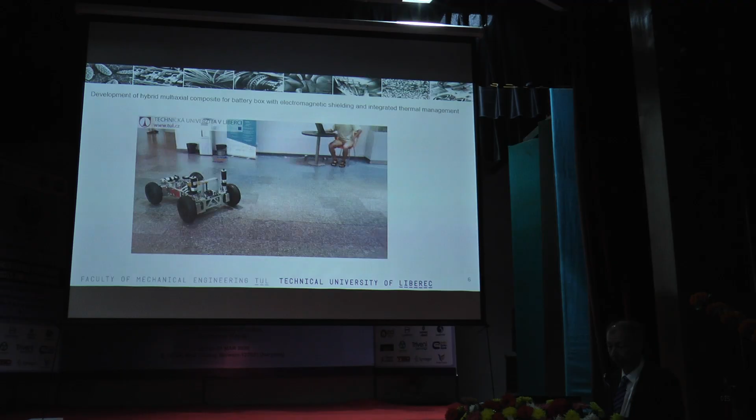Our part, mechanical engineers, was construction, design; mechatronics created controlling software, logic; and textile engineers created the cover of this car. In this video it is without cover. But we were thinking about which part we can improve, and one of the parts we can improve was the battery or battery box. This vehicle has a standard commercial battery, but we were thinking about improvement of the battery.

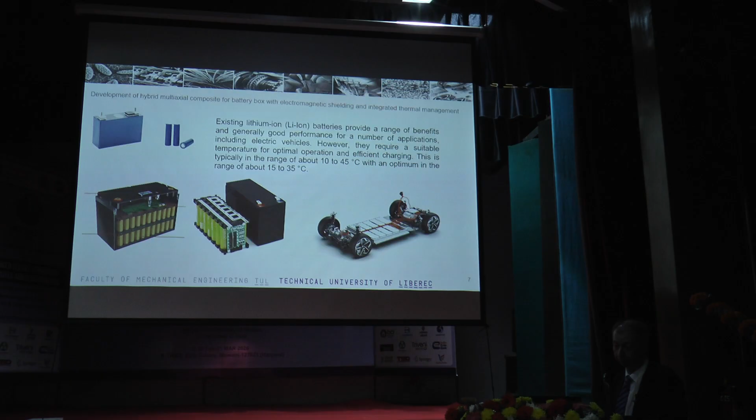Usually batteries use these cells. Other kinds of batteries are possible, but usually we use cylindrical cells, and a key parameter of the battery is temperature. Optimal temperature is about 15 to 35 degrees Celsius, but more interesting is the difference between individual cells. During charging, if the cells' temperature difference is over 5 degrees, it can be a little bit of a problem. If it's over 10 degrees, the lifetime of the battery goes down rapidly.

Then we were thinking about a box for the battery which can provide heating, cooling, and other properties. Heating is important, maybe not for India. For India cooling is better, but in Czech Republic last week we had minus 10 degrees. In the north part of Europe minus 30 degrees is possible. Before you go by electric car, it's good to preheat the battery for its long lifetime.

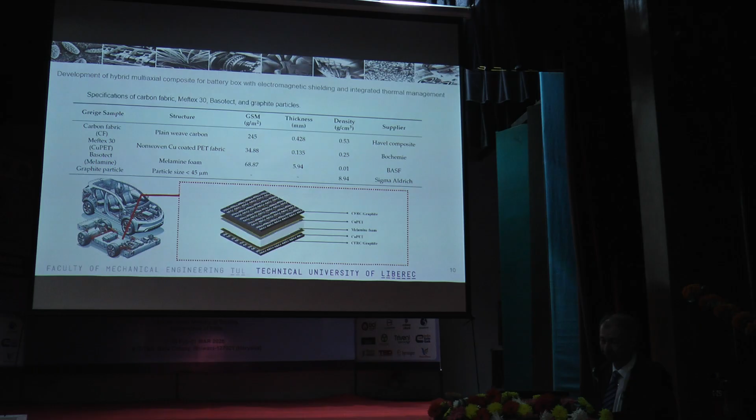So we thought about the design of the battery box, and we started with these layers of batteries: outside cover, inside cover for mechanical durability, cooling system, heating system, and we tried to combine these functions into one layer. Then you can see, we were thinking about a composite with heating properties, maybe also insulating properties, and so on.

The group which was involved in the composite part created a few types of composites, and the input for these composites was plain weave carbon, non-woven copper-coated fabric, melamine foam, and they used graphite particles. And I show you the combinations. We created 8 combinations of these materials.

The first one, only 2 layers of carbon. The second one was 2 layers of carbon and a middle layer with copper. The third one was 2 carbon layers and melamine foam. Melamine foam was there for insulation, and the final one was the full set of 5 layers: carbon, copper, textile, melamine, and again copper and carbon.

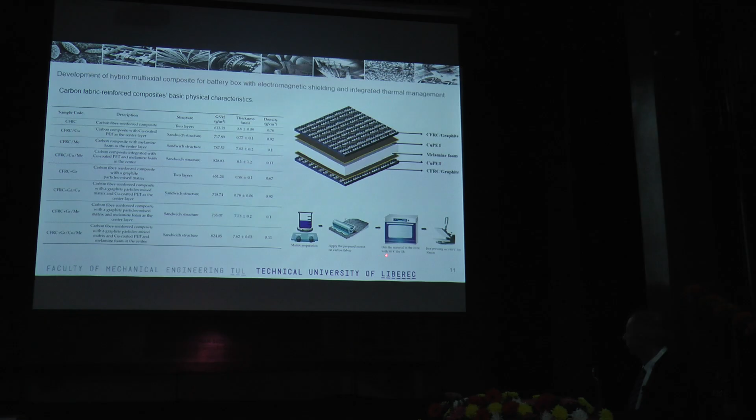The second group was with graphite particles mixed into the epoxy resin matrix. This one with standard epoxy resin, this one with some graphite particles. We used a handmade procedure to create these composite samples. That means like this, dry and hot pressing by hand.

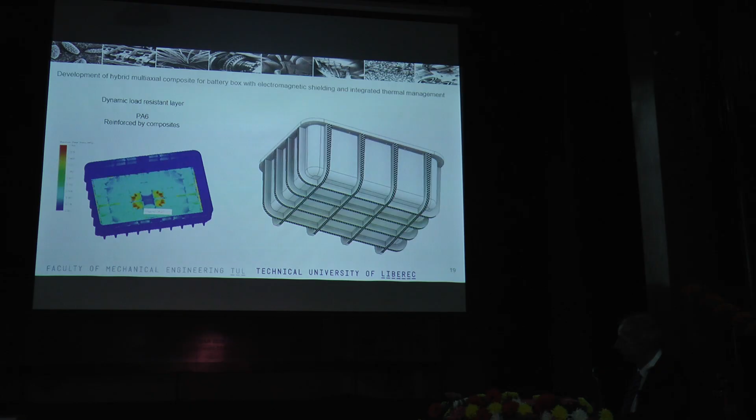There is a plastic cover, PVC foil for protection from rain or something like this. The middle layer is here. It's from PA6. The first attempt was made by 3D printing. After that we reinforced it with carbon filaments. We have a robotic placement head for thermoplastic carbon filaments, and here you can see the animation of some simulations of falling of the battery.

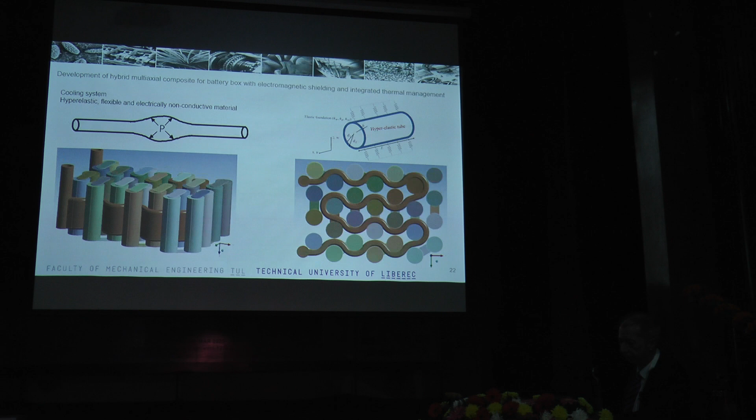And here is final information about the cooling system, because a typical cooling system is made not by hoses but metal hoses, and it's difficult to assemble the hose among all the cells. We use the hyperelastic hose. It's very simple to assemble the battery, and we created a sample for testing, applied the thermocouples, and a colleague tested charging of the battery and the difference between individual cells.

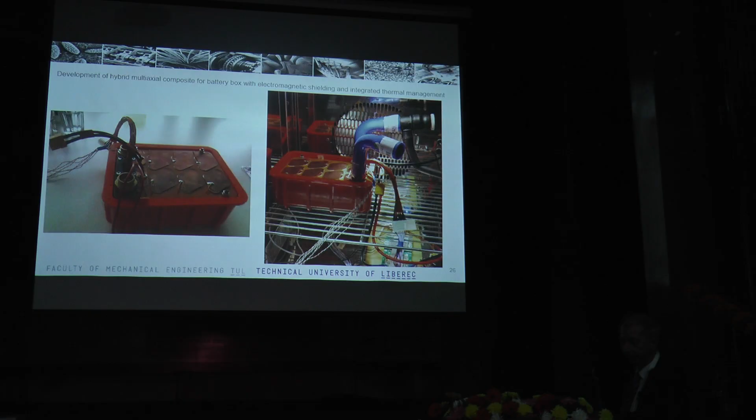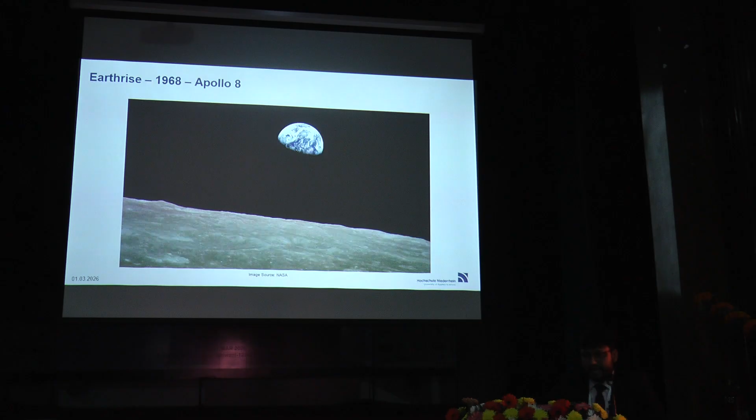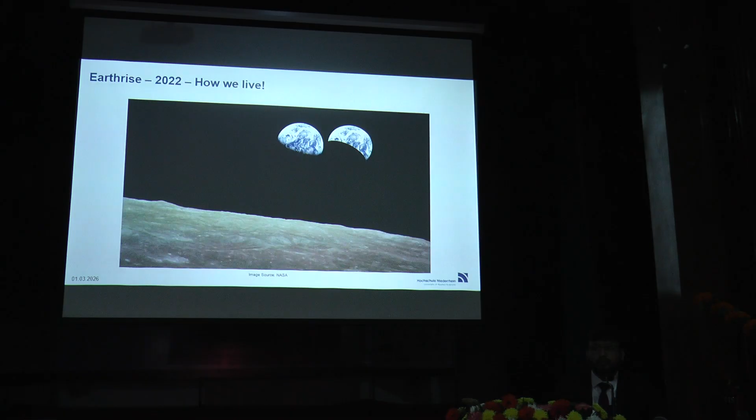trying to imitate the image. And after that, so many rockets and astronauts traveled in outer space and looked at our world, and they found that we are actually living in a similar world, although in so many cases European people might think they are living in a different world, Asian people think they are living in a different world, but that's not true. We are totally interlaced, interconnected in this neural networking system.

So if it is a problem for me in Asia, it is also a problem for Europe, and probably yesterday you saw the news about how the war began between the US and Iran. So yes, it's a problem, and we need to tackle it.

So at the university where I work, we try to combine sufficiency, consistency, and efficiency. And we are trying to create the future through our weaving. How? We are trying to weave technology, material, process, management, policies, and all kinds of deals so that we can be connected through the digitalized platform, which became very, very important for us.

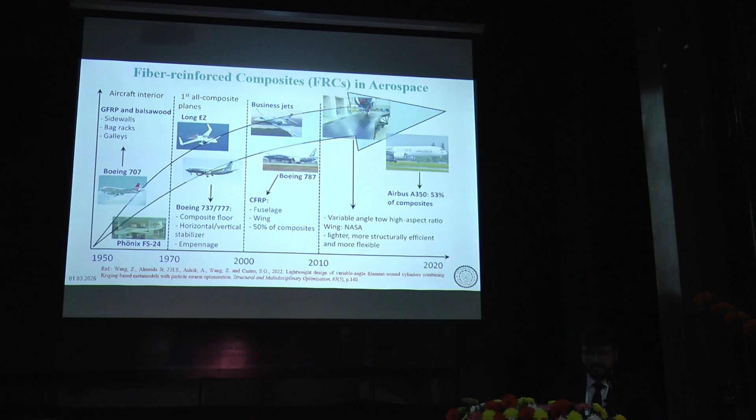So now let's talk a little bit about fiber reinforced composites. As you know, they have been in the scenario for the last 50, 60 years, and they've been heavily used in aerospace, and you can see from this picture that over the years, the usage of fiber reinforced composites has skyrocketed in Boeing and Airbus manufacturing. This morning, Professor Sabas mentioned it in his lecture, and this graph shows how much advancement has happened, especially in fiber reinforced composites for aerospace structures.

And as Professor Behera also mentioned in his lecture, this usage and the market are growing; it's going to be a $71 billion US market by 2031, with a compound annual growth rate of almost 10.75%. They will be involved in electric vehicles, aerospace, automobiles, and hydrogen vessels, which became a very important topic for using hydrogen fuel in the automotive industry.

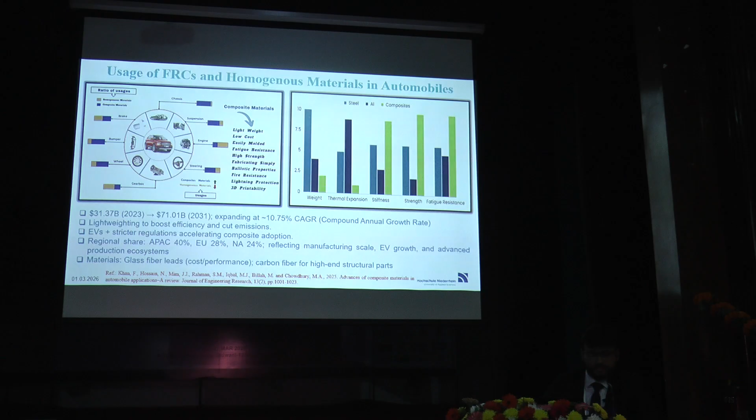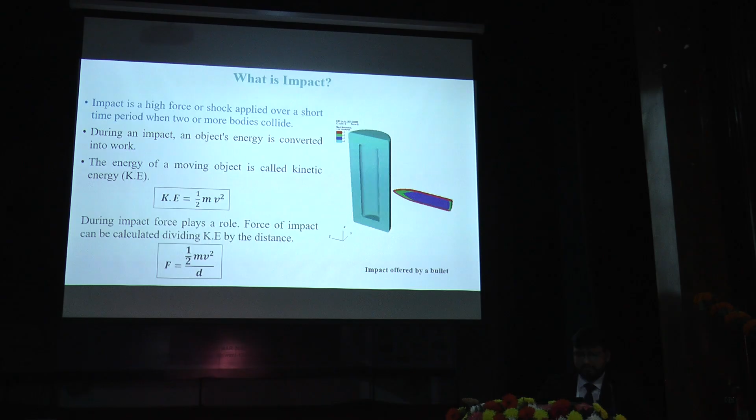So why is it important to study, especially in critical engineering applications? The main reason is that as we use more and more fiber reinforced composites, we have to understand that they are taking a major share of the structural body of the aircraft. And they are very prone to different types of impact events, knowingly or unknowingly. So 90 out of 688 repairs happened in the Boeing 747, where the average life was 29,500 hours. Most of the incidents were by low velocity impact.

As airlines are one of the heavily regulated players, obviously we need to think about safety. Otherwise, none of the products we try to use in the aircraft industry will pass the FAA regulations.

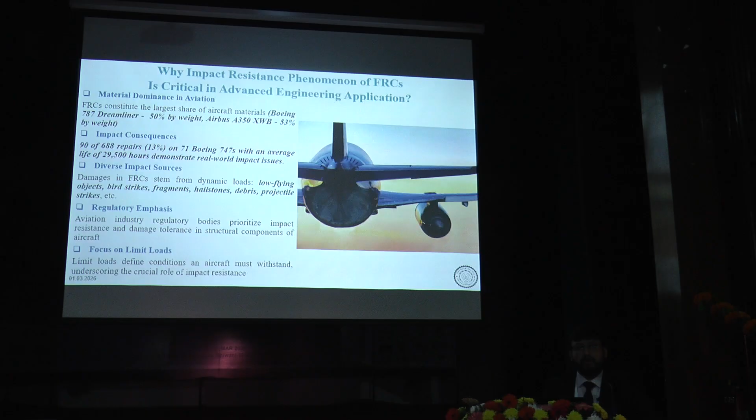So when we are talking about lightweight engineering structures by textile reinforcement, we have to think about how we would like to design it. Previously, the choices were very limited: unidirectional materials or 2D biaxial with stacking sequences 0/90, 0/45 and others. We designed it, but there was a major issue. They were delaminating, buckling, and interlaminar cracks were happening. So there was a disconnect between the layers and it could not be satisfied as an integrated structure.

For that reason, we had to introduce 3D weaving technology to get near net shape structures. If it's a near net shape structure like honeycomb, which you probably saw during Professor Behera's lecture, it can absorb an enormous amount of energy under impact load. For that reason, we need to re-engineer, redesign the preform, the very basic part. And then we need to think about which matrix we will use to satisfy the mechanical attributes we are looking for.

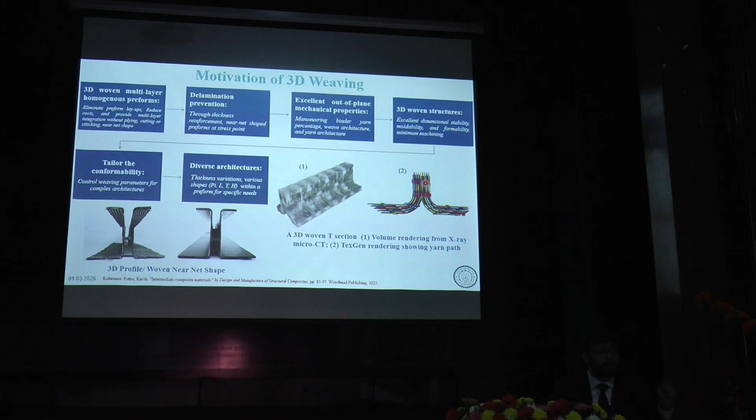Potentially 3D weaving can be used in different forms, in all kinds of hollow structures, solid structures, contour structures, even in nodal structures. The benefit is you can get a near net shape without any welding or joining in a very critical area where impact load can cause a very disruptive, fatal incident.

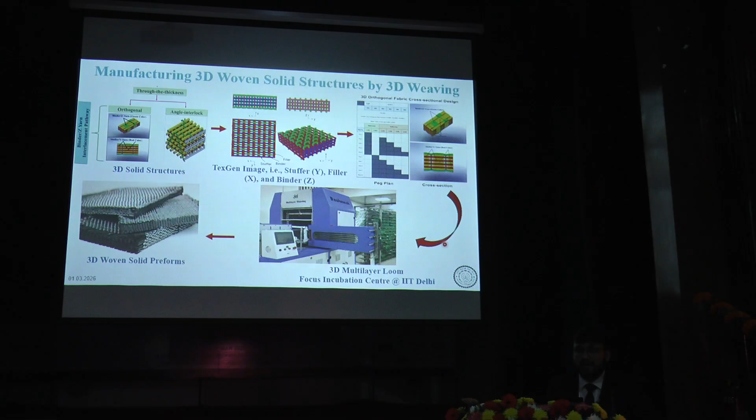So for this research, with the results I will be showing here, I did it through this mechanism. First, we did the cross-sectional analysis, and then through software we tried to understand the binder path with the yarn. Then we used a multi-layer 3D weaving machine made in India under the leadership of Professor Behera. The machine came to our lab in 2020. By the way, it's actually made in Haryana, by a company called Dashmesh. They gave us the loom and we made 3D woven structures.

In this research, the weave topology, our weave architectures, can be explained in different ways. One way is to use different conventional weave designs that we know, like basket, plain, twill, angle interlock. Another is, what is the impact if we change the velocity of the impactor or change the impact energy threshold? So if you look, I took 6 different structures here.

Three of them here are very conventional plain structures where the crossover point is quite high. When we change the binder pathway, this is orthogonal twill, and there are basket structures with a shorter float. That's why I gave the name mat 1 up, 1 down.

When I increase the length of the binder pathway, mat 3 up, 3 down, and then again we change the perpendicular direction of the Z reinforcement on the plane in a slightly angled way. We call it angle interlock, conventional angle interlock plain, and then angle interlock twill. And we manufactured 100% E-glass, used 600 Tex reinforcement, and we developed these 3D woven structures.

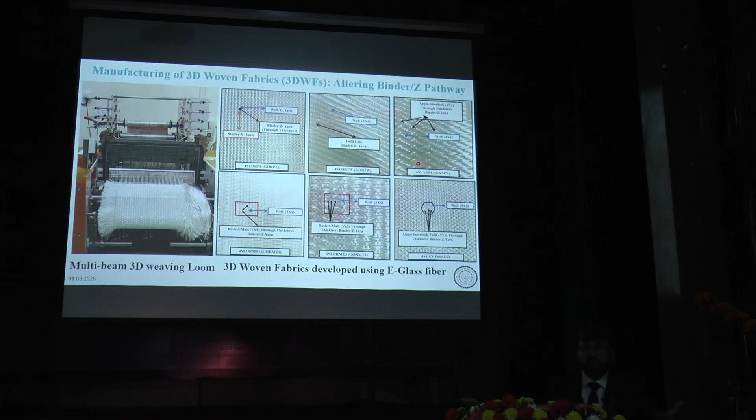So these are the specifications. We try to keep the gram per square meter, the areal density of these structures, very close to each other, so that there is no manipulation in fiber volume fraction. But of course, due to the nature of the weave architectures and the binder float pathway, the changes of the crossover points, the changes of stuffer warp fiber volume fraction and binder warp fiber volume fraction played a significant role, and that's what I want to prove here.

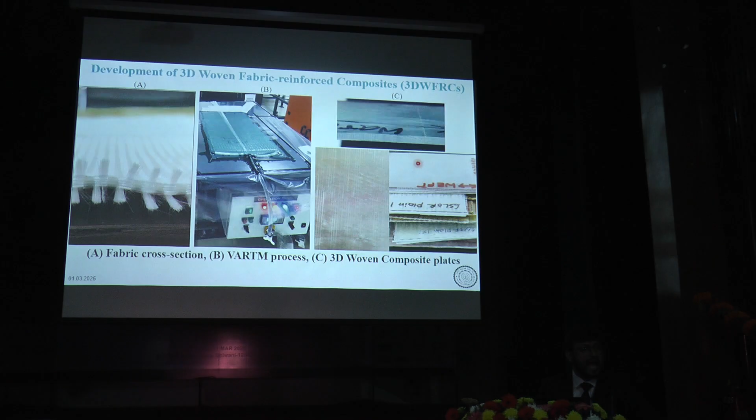So the manufacturing of preform to composite was pretty straightforward by using an industrial VARTM machine, which is also made in India by a company from Gujarat called Indach. And it has a wonderful temperature gradient system as well, so that curing happens in a very nice way. I spent quite a few years to make these composite structures as good as possible with homogeneous penetration of the matrix with glass filament.

So in this case, we try to do the out-of-plane impact testing. We test 5 different impacts from 5 different nominal heights and impact velocities, keeping the total weight of the drop weight exactly 10.40 kilograms with the same hemispherical 12.7 mm shape. You can see an example at 50 joules, my structures were fully perforated.

How did I choose this 16 to 50 joule segregation? I had to do a series of experiments, nearly 50 samples I had to waste to understand what is the lower threshold, what is the intermediate threshold, and what is the perforation threshold.

So before I go deep, this is for the students actually, not for the senior researchers: how you should understand the data you are receiving. What is your data saying to you? Is it telling you a story? If you look at it very carefully, it's telling you a lot of stories. This is one example. Same structure, orthogonal plain, 1 up, 1 down, under 16 joules. The behavior of force versus time.

Should I have? Please give me a grace of a couple of minutes. 3 minutes. Give me 5 minutes at least.

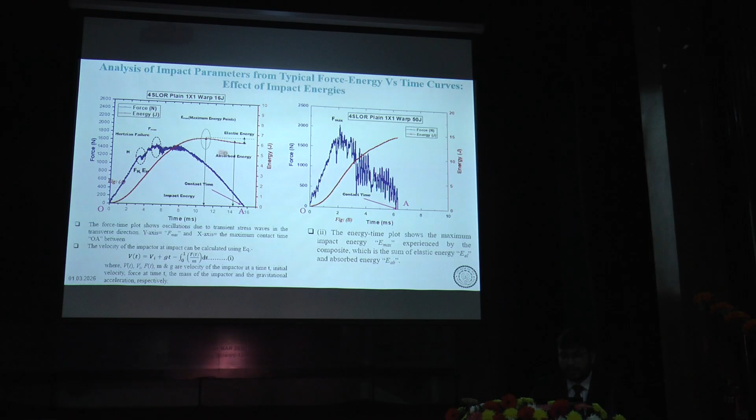Right. So if you see the gradients there, you will understand the behavior at 16 joules of these structures, where the Hertzian failure came at a very late force, but the Hertzian failure at 50 joules happened quite early. And from the force displacement curve, we can decide the nature of the structure under 16 joules and 50 joules. It was not perforated at all, so rebound happened, and it was absolutely perforated with a lot of friction after the peak force. This is the peak force of the structure.

As time is short, I will go a little bit quicker now. So here's another way to evaluate the force displacement curve for more data. Because this is not a straightforward curve, it's telling you a lot of stories. What is the initiation energy you are getting before the peak force is achieved under the impact event? What is the perforation energy area you are receiving after the peak force?

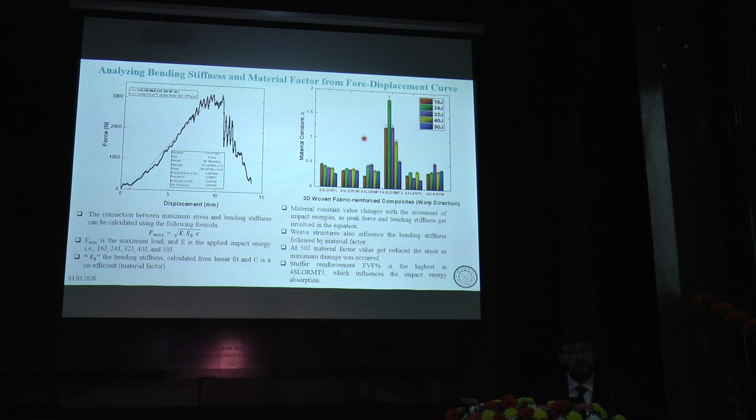In this force displacement curve, as I mentioned, at 16 joules I got rebound for all structures, 24 joules, rebound and onset perforation, which is the intermediate one, 32 joules, onset perforation for some structures and perforation for others. And obviously, 40 and 50 joules give me complete perforation. But the interesting fact is how I can make a relationship among them and give a ranking. And I gave the ranking by calculating bending stiffness from this force displacement curve. I found that orthogonal mat 3 up 3 down, which is a non-conventional weave designed for 3D woven preform, gives me the highest value of material factor.

Which means it's a better structure, so we don't use it in a regular conventional setting. We always use the plain or twill or something, not the mat.

Then I tried to do the energy profile diagram, to understand how the structures behave over the period from 16 joule to 50 joule - whether they give a concave or convex polynomial regression - because I wanted to see how they were telling me the story. The story was quite clear to me.

When you change the binder pathway, it changes the behavior, and of course it depends how you are implementing it for analyzing the weave. For example, this mat 3 up 3 down structure, which I'm very profound about, is going in a very positive direction, absorbing more energy upon the impact applied to it.

Finally, I tried to calculate the ductility index by evaluating the area of initiation energy and the perforation energy. For me, the structures which can remain intact in the initiation energy area are the good ones, because the structure can sustain longer before it reaches the peak force.

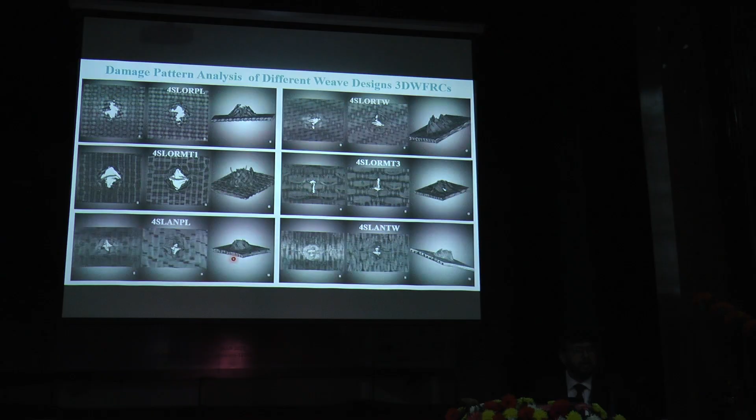Then we did the X-ray testing to understand the perforation and damage area, and it told me an incredible story. The structures with the basket form did not catastrophically propagate the crack - it stopped the crack in so many ways. You can see it's a very small crack. But for other structures, quite a big hole or puncture happened.

Also, when we evaluated the fiber volume, the area, and how the matrix was penetrated, I found the same thing: the mat 3 up 3 down has lower interlace and crossover points, and it was homogeneously impregnated with the matrix.

So I also did this relationship with in-plane Izod testing, trying to understand the interlace and crossover points relationship with drop weight impact and Izod relationship, and found something very interesting. If you have less interlace points in your open preform, your drop weight impact behavior increases, but it's the opposite in in-plane or edgewise Izod direction - if you have more interlace and crossover points, the in-plane impact behavior changes totally.

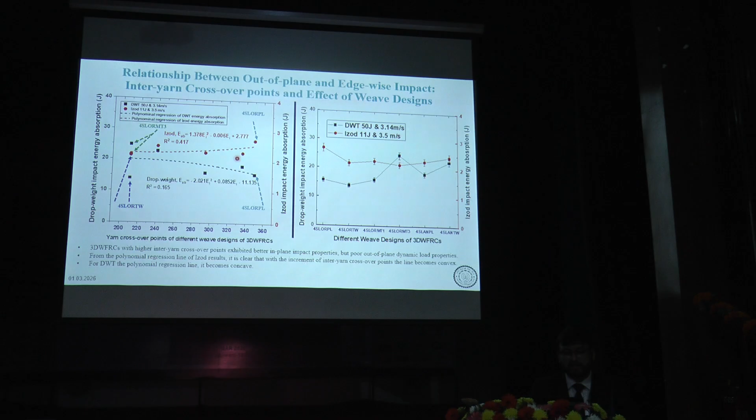Okay, I'm finishing, just to let the young researchers know we need to think about how we should do our research data management system. In our university, the project I'm working on, called Smart Interface, we are trying to develop a methodology so that data doesn't leave with you on your computer after you leave the university. It should remain in the university system so that next generation researchers can access it and talk with it the way you talk with your ChatGPT.

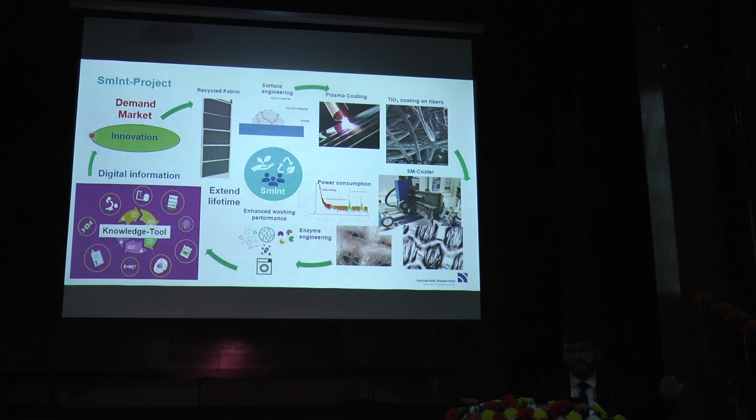This is the way we are trying to do it through this circular loop method called the Knowledge-Tool. We created a domain and a research environment where people can collaboratively put information, and the next generation researchers can talk with that.

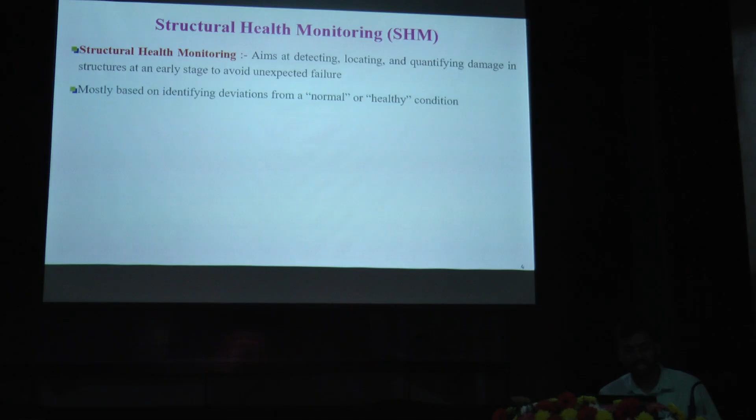But these micro cracks or the debonding within the composite structure, if not identified earlier, can cause the structure to fail catastrophically. Therefore, the concept of structural health monitoring was developed. This structural health monitoring aims at detecting, locating, and quantifying damage in the composite structure at an early stage to avoid any unexpected failure of the structure.

There are various types of structural health monitoring systems developed to identify damage within composite materials. Resistivity-based methods for detecting damage non-destructively within the composite material are one such technique. Using this technique, you can detect micro-scale damage up to milli-scale damage within composite materials.

So we are using the resistivity-based method to develop strain monitoring sensors using textile materials as a substrate, and this particular strain monitoring sensor uses the piezoresistivity principle.

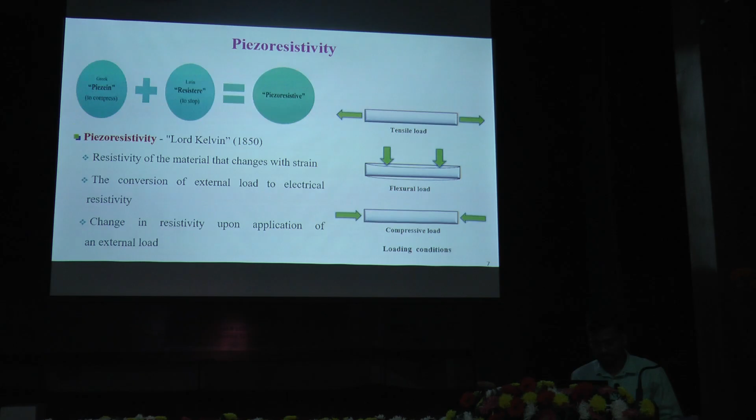This piezoresistive sensing source can be intrinsic type or extrinsic type. The sensing approaches could be self-sensing, or you can use piezoresistive matrix materials, piezoresistive surface deposited or mounted sensors, or embedded piezoresistive sensors.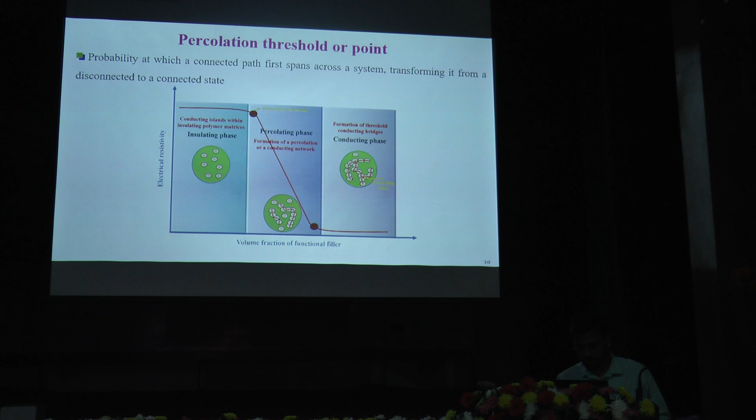One important terminology when developing this piezoresistive material is percolation threshold. This is the probability or point at which the connected path first spans across the system, transforming it from a disconnected to a connected state, and the current flow starts in the sensor. Then there are strategies for selecting the piezoresistive sensing approaches.

First is the gauge factor, which is very important when developing strain monitoring sensors. Gauge factor is simply the ratio of fractional change in resistance divided by the strain experienced by that particular composite material, based on the manufacturing method and detection capability.

At NIT Jalandhar, we are using glass textile as a substrate and epoxy resin as a matrix material to develop these strain monitoring sensors.

The nanomaterial we are using for creating the conductive pathway is reduced graphene oxide. We are also using titanium dioxide as it is a semiconducting material, and chitosan. So we have developed two methods: one is the matrix-based method, and another is the coating-based method.

This particular method is our patented method. Ethanol is initially mixed with the nanoparticles, that is reduced graphene oxide, and then epoxy is added into this mixture. You have to continuously stir this mixture at 75 degrees centigrade, then evaporate the ethanol and add the curing agent into the epoxy resin, and then apply it on the substrate, that is glass textile. This is how we develop this particular sensor.

And this is the coating based method. The materials are the same, but the method used to produce this particular sensor is different.

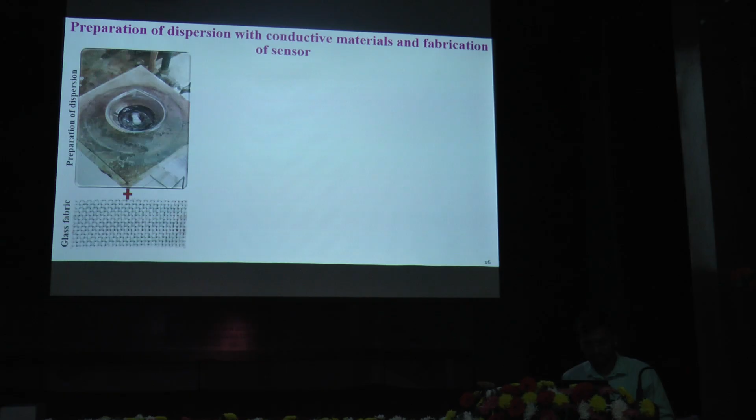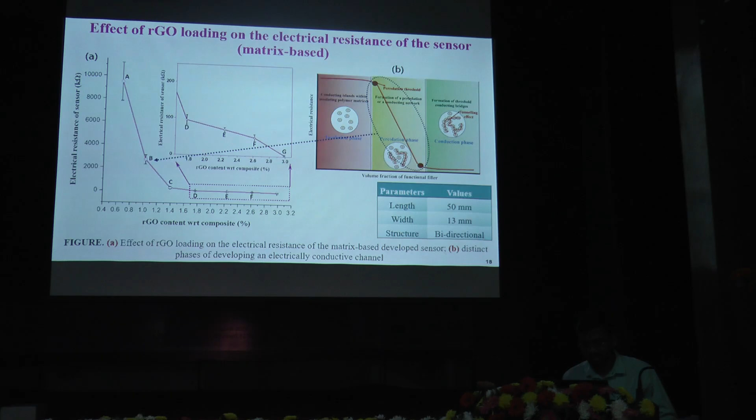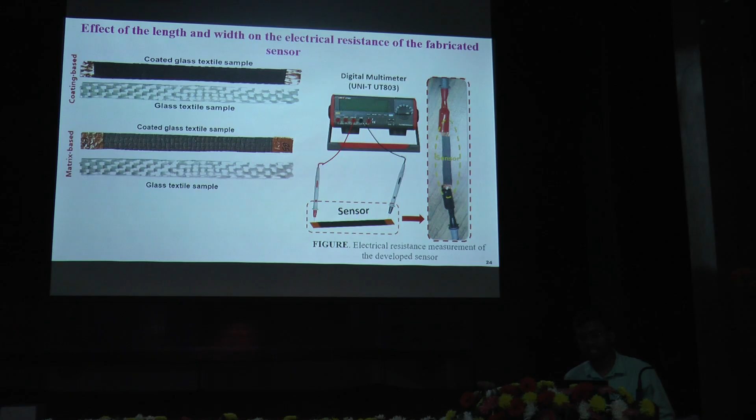We have done a lot of study on this particular sensor. Initially we studied the effect of length and width of these sensors on electrical resistance. So we changed the length and as well as the width of this particular sensor. When we change the length of the sensor, the electrical resistance definitely increases. And when we increase the width of this particular sensor, the electrical resistance of the sensor has decreased.

After understanding this, we developed these particular sensors using different textile structures, for example unidirectional structure as well as bidirectional structure. So these are some of the specimens.

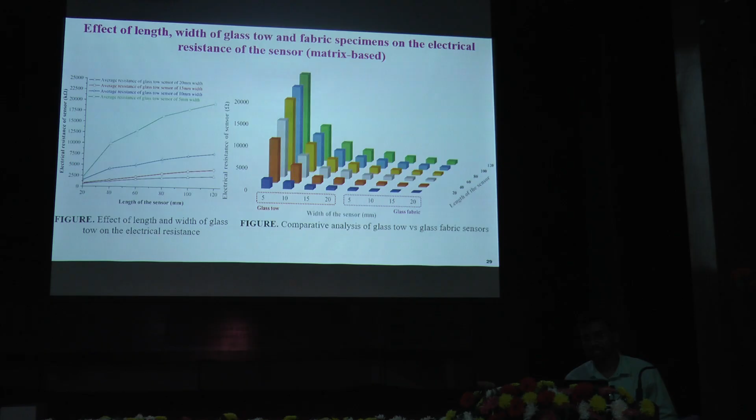This is the effect of length and width of the glass tow and fabric specimen based sensor on electrical resistance. From this particular graph you can see that when the length of the sensor is increasing, the electrical resistance is increasing up to some kilo ohm, and after that it becomes almost constant.

Further, we tried to change the geometry of the sensors and put this particular sensor in the composite material. We understood from this experiment that with increasing the length and decreasing the width, the electrical resistance of the sensor shows an increasing trend, and the sensors produced using the glass tow show higher electrical resistance compared to the sensor made from glass fabric, while keeping all parameters constant.

Further, we studied the effect of sensor length and the stacking position on the electromechanical performance. Stacking position means where you are actually implementing this particular sensor within the composite, for example at the top, at the middle of the laminate, or at the bottom of the laminate.

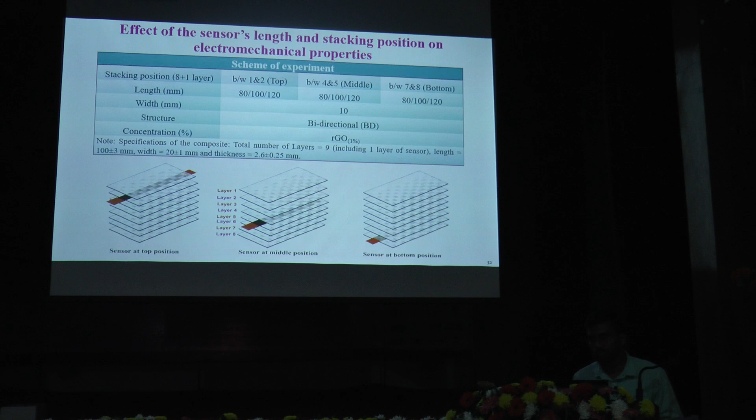From this particular experiment, this animation shows how this particular sensor was implemented in the composite material, and this is the setup to analyze the electromechanical performance under quasi-static 3-point bending test.

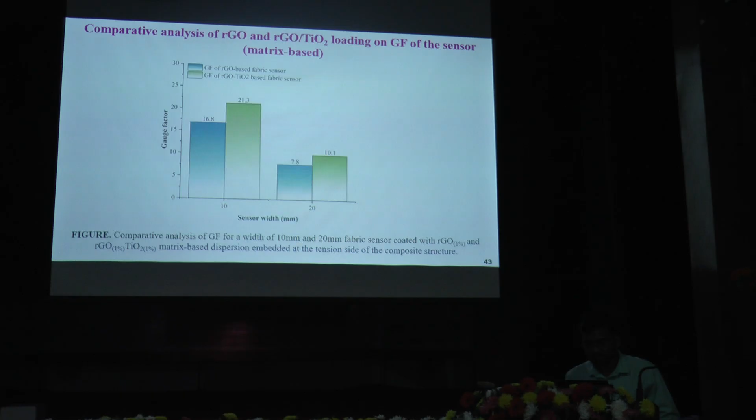Let me go to this slide where we compared the two methods of developing the sensors, that is the matrix based method as well as the coating based method. We checked it with the tow based sensor as well as with the fabric based sensor. This is particularly for the fabric based sensor. Here you can see that in case of the coating based sensor, the gauge factor is comparatively higher compared to the matrix based method.

Inferences from this study are that sensors made of a single 10 mm and 15 mm wide strip show less FCR and gauge factor than 2 and 3 5mm strips in parallel, and the gauge factor of composite embedded with RGO-TiO2 based sensor is higher than the sensor made up of RGO dispersion.

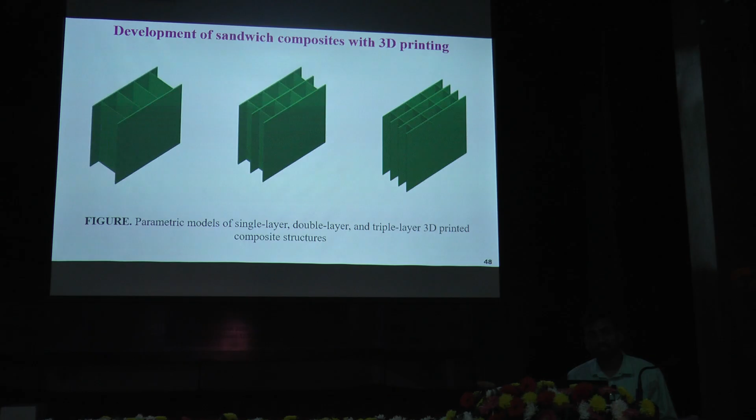Flexural load of composites embedded with sensor is 3 to 12% lower as compared to the parent composite. So further work which we are doing on this particular sensor is trying to calibrate these sensors and developing a methodology to calibrate them, and trying to implement these sensors in various other structures, for example, 3D printed hollow structures as well as 3D woven hollow structures, and trying to understand the electromechanical performance of these structures.

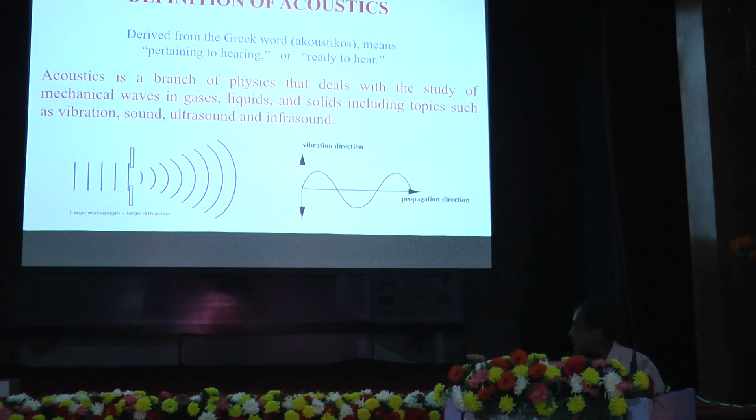Hybrid 3D Dimensional Composites. My topic is acoustic behavior of hybrid 3D woven fabric and also 3D woven composite. So in this slide we have the definition of acoustics, and acoustics is a branch of physics. You can see here we have the large wavelength, and then we have diffraction, and there is also the vibration direction and propagation direction. So why do we require the study of acoustics? Acoustics is very much a requirement in daily life, because it creates a pleasant environment, good listening conditions for speakers, musicians and listeners, also living environments and working areas free from harmful noise and vibration.

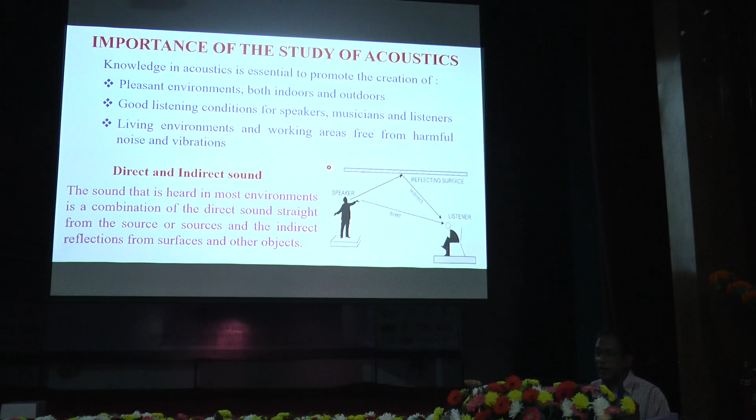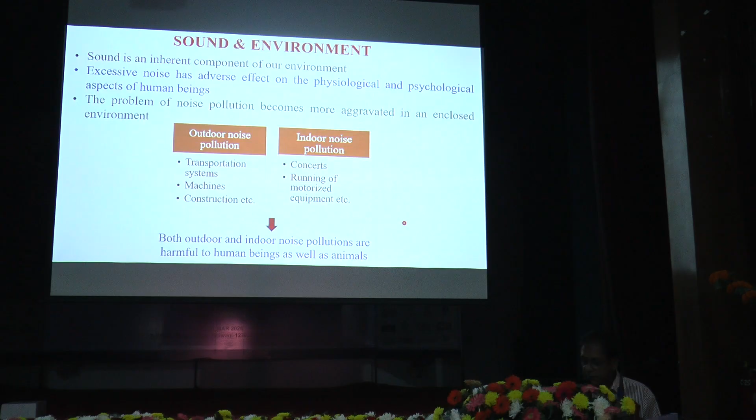Now, in case of sound, we have two types of sound: direct sound and indirect sound. Direct sound is just direct, and indirect sound is coming from a reflective surface. Then we have the interaction between sound and environment. Without sound we cannot survive, because sound is a basic medium of communication. But excessive noise can create a deleterious effect on human beings and also on the natural habitat. Noise pollution is affecting humans, animals, insects, everything. So basically we have outdoor noise and indoor noise pollution, and we can see what is the outdoor noise and this is the indoor noise.

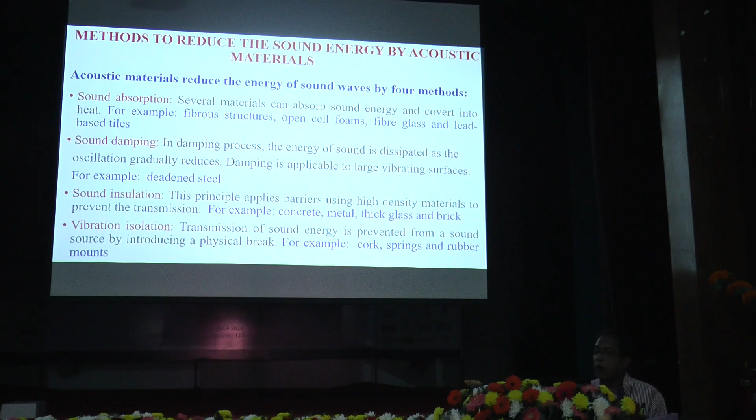Why do we require noise pollution control? Because we require fabricating quiet machines, designing buildings and structures and using sound absorption material. The major areas where noise control is essential are residential noise control, automobile, aircraft and space; during launch of spacecraft it creates noise. We also require building modification. Then we have the methods to reduce sound energy by acoustic material: sound absorption, sound damping, sound insulation and vibration isolation. In acoustic absorption, the energy manifests into different types like heat, mechanical and deformation. A number of sound absorption materials exist; their ability to absorb sound waves depends on the frequency, composition, thickness and method of mounting.

So there are basically three primary types of sound absorber: porous, membranes and resonance. Now, why are textiles used for acoustics? In case of conventional material, we can see that we have mineral wool or polyurethane foam, but mineral wool is hazardous from the aspect of respiratory disease, and in case of polyurethane, we can see that it generates various types

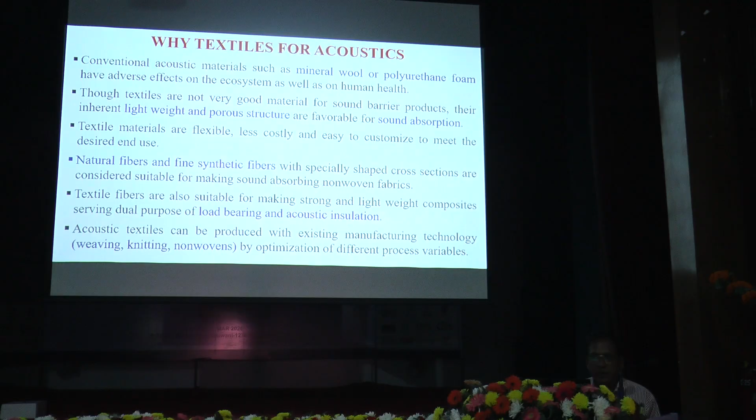of gases. And then in case of textile, we have the advantage of lightweight and porous structure, which is favorable for the sound absorption. In case of textile material, we also have the flexibility in structure. And then natural fiber, fine synthetic fiber, various cross sections we can use. And then in case of textile, we have existing manufacturing technology like weaving, knitting, and also non-woven. In case of weaving, we have the least production rate, in case of knitting, we have 10 times production rate, and in case of non-woven, we have 100 or 1000 times production rate.

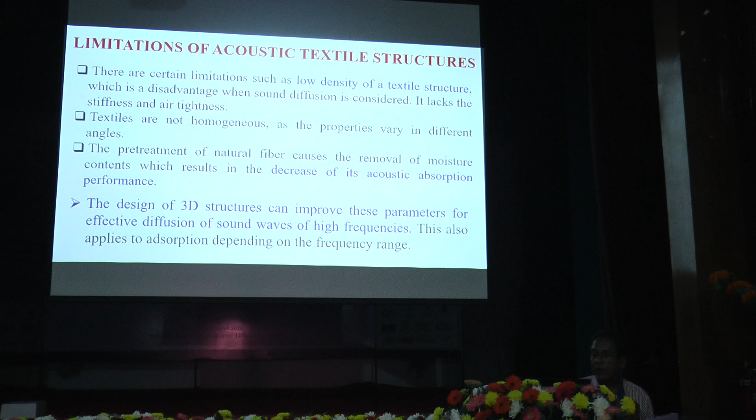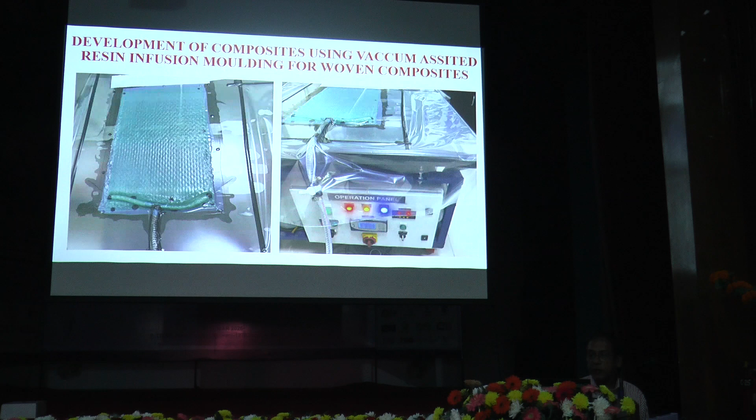And then in case of this development of 3D hybrid fabric, we have used this electronic Dobby loom, and these are the specifications of the Dobby loom, and then this 3D woven composite is manufactured using this vacuum assisted resin infusion molding. And then we have the characterization of the developed fabric, and the acoustic characterization of the textile material, and we have to measure the sound absorption coefficient, and it is measured at 1/3 octave frequency of 50 to 6300 hertz.

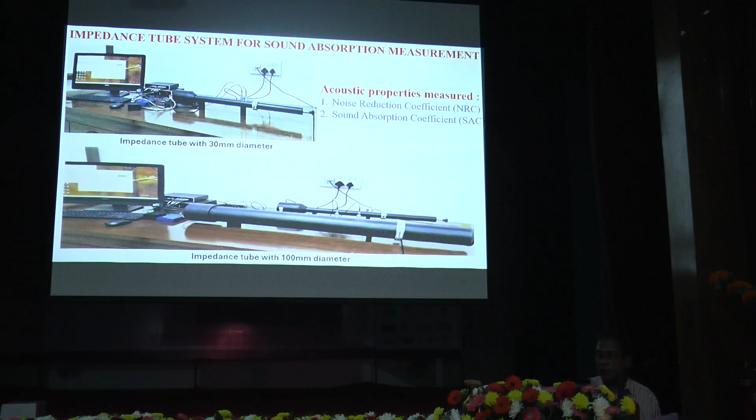Then this is the actual impedance tube diagram, and then we have the calculation of the noise reduction coefficient. In case of noise reduction coefficient, we have just taken the average of the sound absorption coefficient at different frequencies, and then we have the calculation of the sound absorption coefficient. In methodology, we have the sample preparation of 3D orthogonal fabric and development of thermoset composite. In case of this hybrid fabric, up to 11 categories of hybrid fabric we have developed. These are the diagrams of the 3D hybrid fabric. Basically, we have taken jute of 982 tex and 491 tex, and also glass of 1000 tex, and 600 tex.

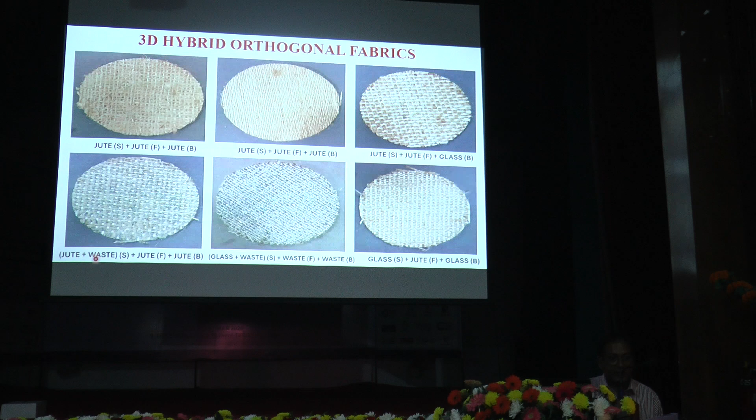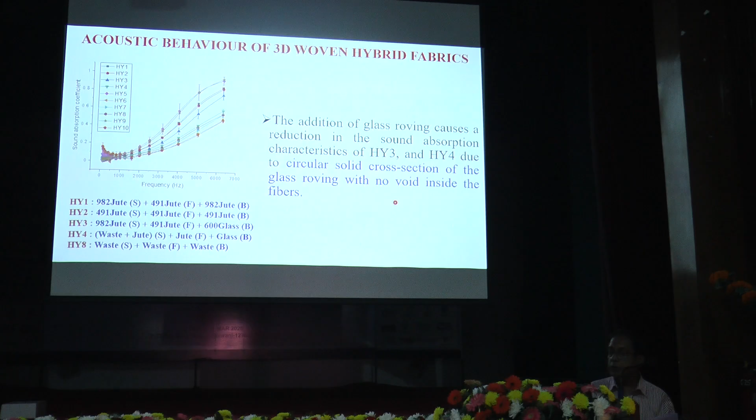Then here we also have the sound absorption coefficient, and you can see that the addition of glass roving has caused the reduction in the sound absorption characteristics of HY3 and HY4, because glass has a solid cross section, and due to this solid cross section, there is no void inside the fiber, so it causes the reduction in the sound absorption coefficient.

Then why do we require the composite development? Because we require acoustic insulation. Acoustic insulation is also important, as well as acoustic absorption. We generally use it in building and civil structures, and this composite possesses excellent properties like low weight and high strength, stiffness, impact resistance, and in conjunction with other sound barrier fillers, we can enhance the sound transmission loss, and sound absorption can also be enhanced.

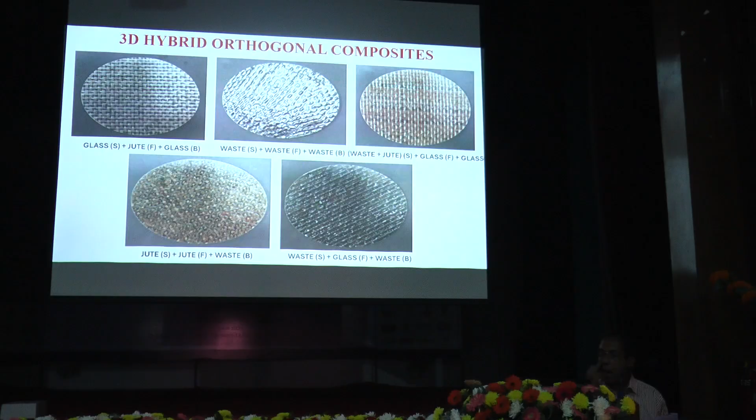Epoxy resin is basically made up of hardener and cross-linking agent. Due to the hardener and cross-linking agent, they have created a very complex chain-like structure, a complex bonding structure inside the material, and as a result there is very little option for acoustic absorption. So all of the materials behave erratically, and we do not find any sound absorption coefficient.

Now one thing we have done wrongly: we shouldn't have studied the acoustic absorption. We should have studied the sound transmission loss behavior. And for the thickness of the material, we have used 3 mm. But to have standard acoustic insulation, the material thickness should be equal to 5 or more than 5.

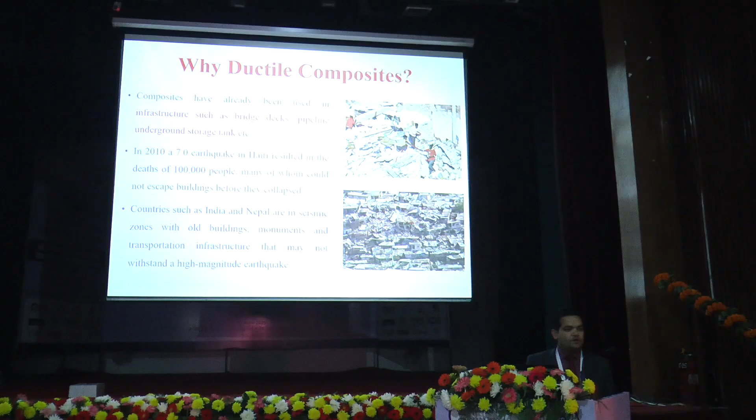So why ductile composites? They have already been used in civil engineering applications, for example bridges, decks, pipelines, storage tanks, etc. But in 2010, there was a big earthquake in Haiti which resulted in the death of about 1 lakh people. Many of them could not escape the buildings.

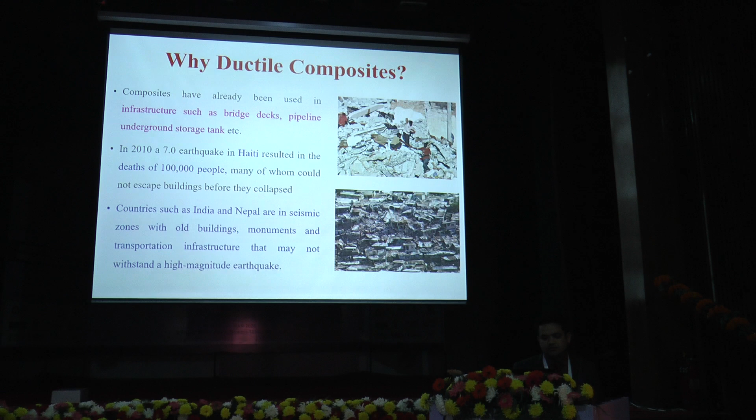Countries like India and Nepal are in the seismic zone with many old buildings, monuments and transportation infrastructure that may not withstand such magnitude of earthquakes, which raises the need for such composites. The application areas are very vast for composites: aeronautics, wind turbines, sports, civil and automobile also.

There are several techniques to enhance ductility: discontinuous reinforcement architecture introduced into any polymeric material, hybridization, fiber reorientation, aligned discontinuous fiber reinforcement, stacking sequence, and ductile matrix. These techniques are able to produce a different stress strain response with a plateau region, like you can see in the blue curve, and the red curve shows the typical behavior of a brittle material.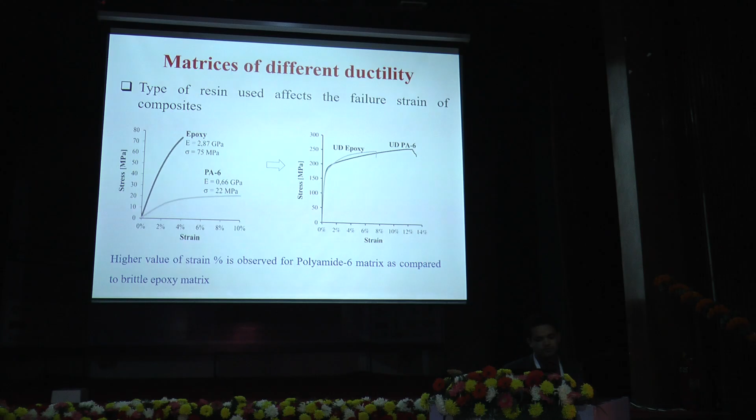Then the effect of stacking sequence. Placement of low strain material in between high strain material shows more progressive and more ductile behavior. And matrix of different ductility: this is a comparison between epoxy and polyamide, and a higher strain percentage is observed in the polyamide matrix as compared to the epoxy matrix, which is brittle.

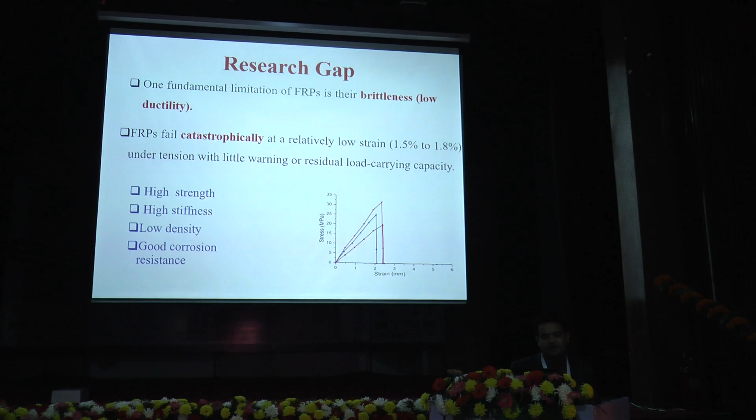So this is the research gap. Composites are inherently brittle in nature, and they fail at very low strain values, although they have high strength, high stiffness, low density, and very good corrosion resistance. So we have developed some composite specimens using glass epoxy, epoxy as the matrix material and glass as the reinforcement.

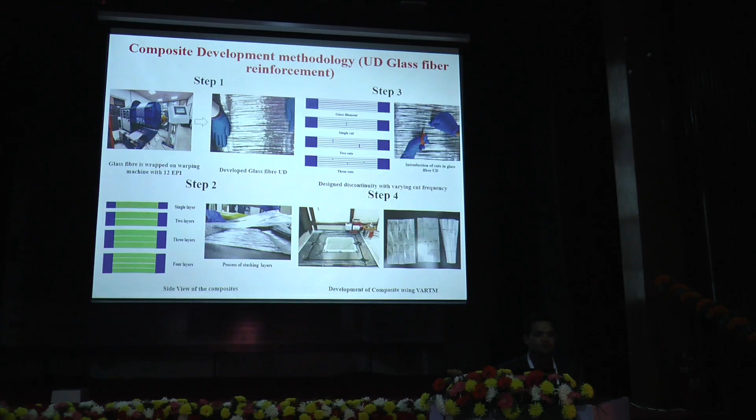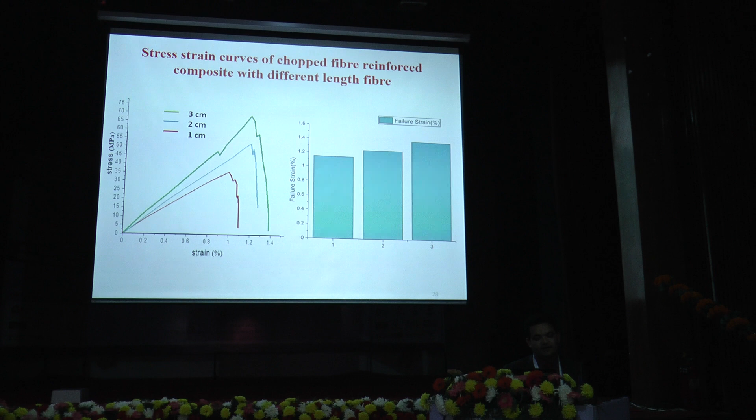Also we have seen the effect of fiber length on the ductility. So we have tried different fiber lengths, 1 centimeter, 2 centimeter, and 3 centimeter reinforcement, and with increase in fiber length also the ductility percentage increased. This article we have published in Journal of Composite Materials already. Introducing cuts within the UD layer increased the failure strain up to 0.5%, and while stacking multiple layers combined with discontinuities, we have improved the strain up to 1.3%, and the highest gain we have achieved in the 3 layer cut composites and the composite reinforced with the longer fiber, which is 3 centimeter. In case of chopped fiber reinforcement, we have achieved ductility enhancement of about 0.3%.

My topic today is Artificial Intelligence in Fiber Reinforced Composites, a comprehensive review. My presentation overview is background and motivation, artificial intelligence and machine learning taxonomy, composite design and optimization, microstructure-property relationships, manufacturing process and control, cure monitoring and physics-informed neural networks, defect detection and NDT, in-process quality monitoring, mechanical property prediction, failure and damage prediction, structural health monitoring, multi-scale AI modeling, autonomous manufacturing and sustainable composites, data challenges and federated learning, explainable artificial intelligence, and challenges and future directions.

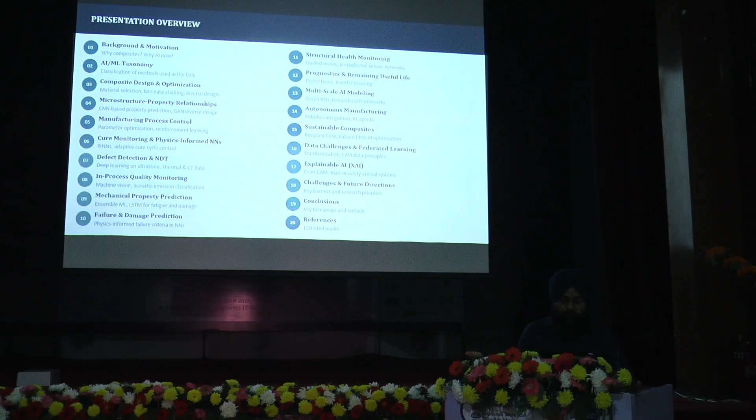So first, background and motivation. Why do composites matter? Nearly 50% and more is used in aerospace, and 40% of composite materials are used in automotive, and in civil engineering they are used due to corrosion resistance compared to steel, and 60% in marine. The challenge, why traditional methods fall short: anisotropy and heterogeneity, testing cost and time. Testing takes time and it's very costly, and failure complexity. The failure chance in traditional models is very high.

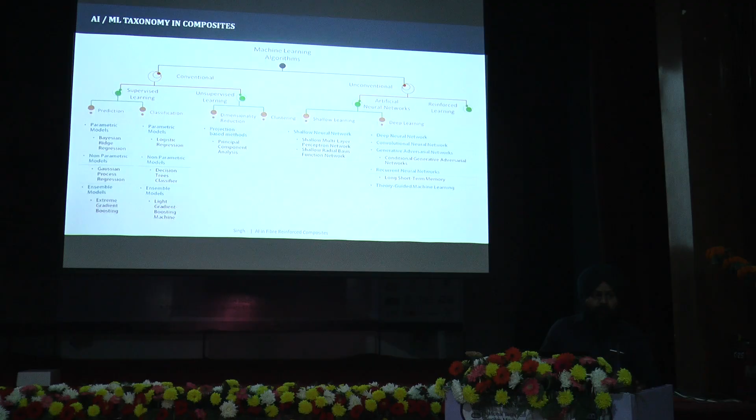In artificial intelligence and machine learning taxonomy for composites, there are two methods, conventional and unconventional. In artificial intelligence and composite design optimization, there is material selection, laminate stacking optimization, and artificial neural networks and predictive surrogates, where design variables, analysis methods, performance outputs, and data transfer train the AI model as a predictive surrogate to predict performance.

Microstructure and property relationship, where convolutional neural networks do microstructure analysis of microscopy images and predict material properties directly, detecting fiber distribution, void content, and interfacial characteristics. In inverse design with generative adversarial networks, the design targets specific properties and generates the optimal structure, shifting from trial and error to targeted material creation. Graph neural networks represent fiber network connectivity and geometry as graphs, enabling efficient multi-scale simulation bridging microstructure to structure scale.

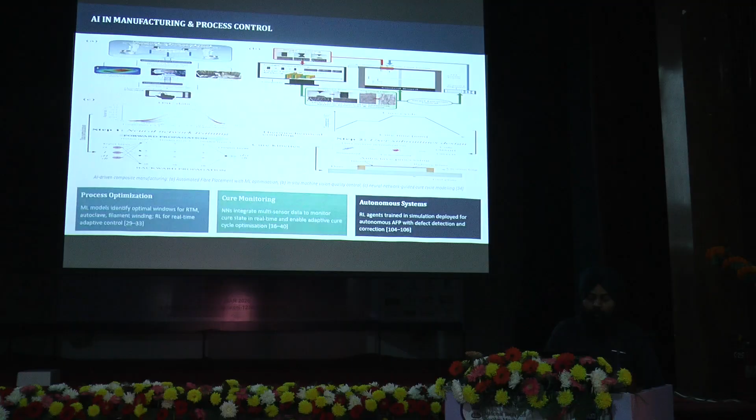Artificial intelligence in manufacturing and process control: in process optimization, machine learning models identify optimal windows for autoclave and filament winding, and real-time adaptive control, where in cure monitoring neural networks integrate multi-sensor data to monitor cure state in real time, enabling adaptive cure cycle optimization.

Next is defect detection. We can detect defects using ultrasonic thermography, X-ray, and CT scan. Ultrasonic can give accuracy of more than 95%, and thermography gives a 3 to 5 times faster report than others. X-ray can give a great explanation of the composite fibers.

In process quality monitoring, we use machine vision systems, acoustic emission, machine learning, and multi-sensor fusion, where material property predictions use random forest and XGBoost, long short-term memory, and track damage evolution from loading history, failure life, and physics-informed neural networking, where failure criteria perform better with less data.

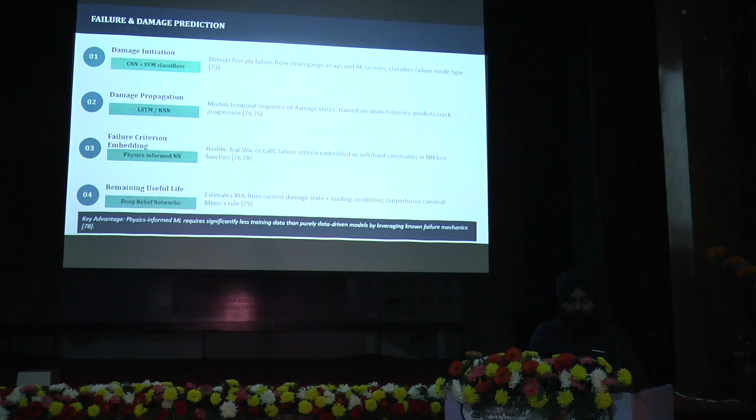If we talk about failure and damage prediction: detects first ply failure from strain gauge arrays and AE sensors, classifies failure mode type, modeling the temporal sequence of damage states, trained on strain histories, crack propagation, and estimating RUL from current damage states, loading conditions, outperforming classical Miner's rule.

We can talk about structural health monitoring, where damage detection and localization use deep learning on guided lamb wave data from piezoelectric sensor networks, achieving remarkable accuracy for barely visible impact damage. Prognostic assessment integrates historical loading data, current damage state, and environmental conditions to forecast damage progression.

Multi-scale artificial intelligence modeling covers nano or micro fiber matrix interface properties, void nucleation, crystal structure of fibers, laminate ply orientation, thickness, interply failure mechanisms, and structural scales, where buckling, impact response, fatigue life, and multi-scale damage accumulation are considered.

If we talk about autonomous manufacturing of sustainable composites, artificial intelligence and robots integrate to enable fully autonomous fabrication without human intervention. RL agents learn optimal automated fiber placement strategies through simulation, then deploy in the factory.

If we talk about sustainable and recycled composites, machine learning optimizes natural fiber composite formulations like hemp, flax, and jute for maximum performance with minimum environmental impact, and predicts properties of recycled carbon fiber composites, enabling confidence in recycled carbon fiber for structural application.

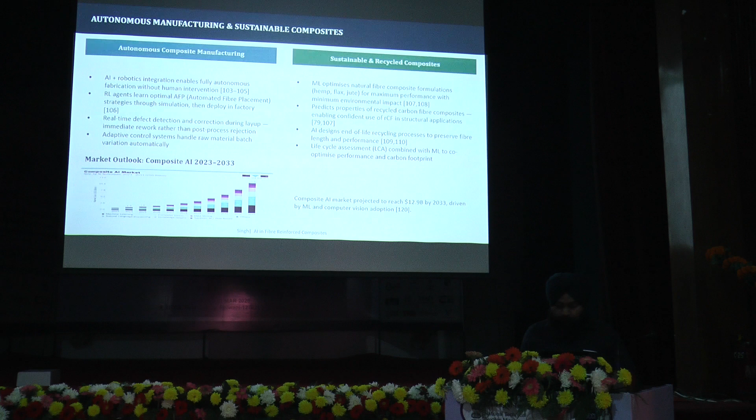If we talk about data challenges and federated learning, data scarcity is the main issue. Composite testing is expensive, where failure datasets are small by necessity, often fewer than 1,000 specimens per condition, with heterogeneous formats, proprietary silos, and bias in representation. The solution to data scarcity challenges is federated learning, which trains a shared global model across distributed datasets without sharing raw data. Each participant's data stays private; only model gradients are exchanged, and FAIR data principles are followed.

If we talk about artificial intelligence trust and safety in critical applications like aerospace and infrastructure, artificial intelligence decisions directly affect structural safety. Regulators, engineers, and operators require understanding of why a model makes a decision, not just that it does.

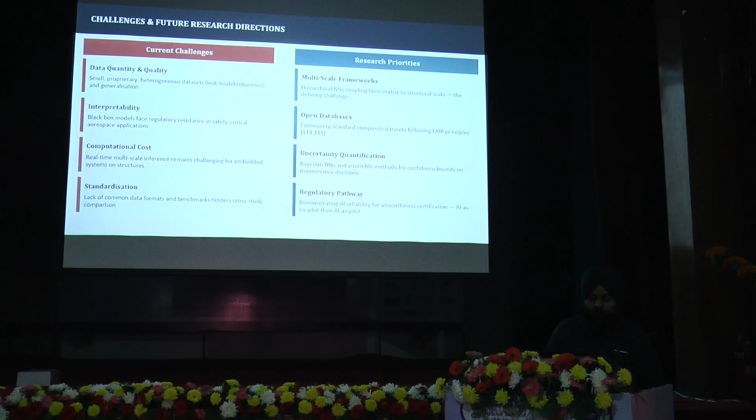Challenges and future research directions: the current challenges are data quality and quantity, interpretability, computational cost, and standardization. The research priorities are multi-scale frameworks, open databases, uncertainty quantification, and regulatory pathways.

Key conclusion: artificial intelligence is transforming the fiber-reinforced composite life cycle from design to end of life. Artificial intelligence offers transformative capabilities across the entire composite value chain, 80% faster design, more than 95% defect detection, autonomous manufacturing, and deep learning handles multi-scale complexity and heterogeneity of composites in ways classical methods cannot.

Physics-informed neural networking represents the most promising direction, combining domain knowledge with data-driven flexibility for more interpretable models. Key barriers remain data scarcity, standardization, interpretability, and regulatory certification for safety-critical uses.